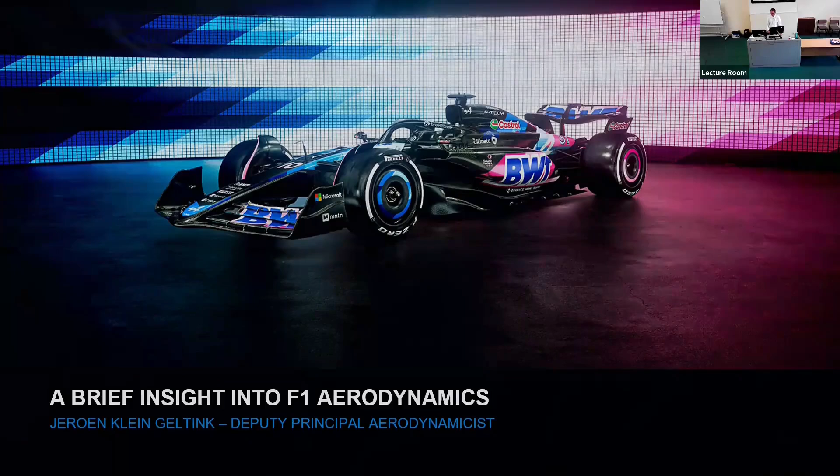But first, trying to wake you up with a sleek marketing video.

So hopefully that gives you a bit of a better idea who we are. This is a picture of our factory in the lovely Cotswolds, about 45 minutes from here, not that far from here in Enstone.

I'll give you a quick introduction into our team, into Formula 1 in general, then I'll tell you a bit about Formula 1 aerodynamics, delve a little bit deeper into the tools we use for our aerodynamic development. And last, I'll tell you a bit about my role with the team and the journey to get into Formula 1. And then there'll be hopefully loads of time for some questions afterwards.

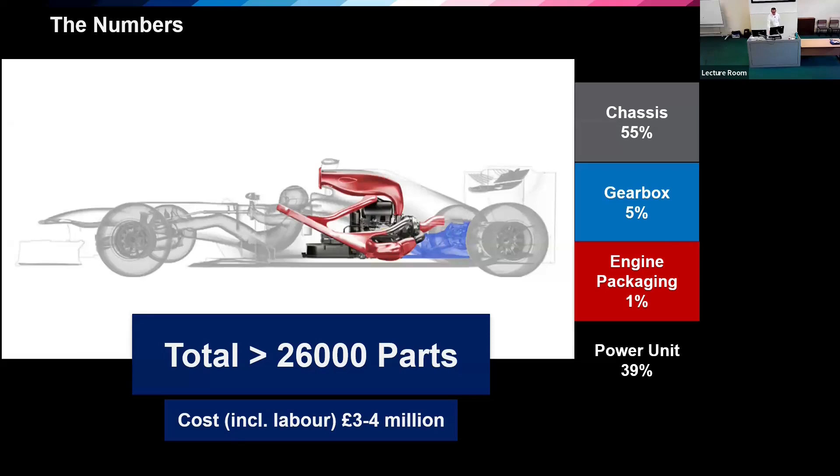Then a question I get a lot, and I'm always a little bit offended by it. Why do all the cars look the same? Because to me, they don't look the same. I know every little detail on every car, particularly in my area, the front wing. But this is the reason why. So the FIA regulates the sport. We are in the sport, so there's loads of rules. And there's about 180 pages of rules.

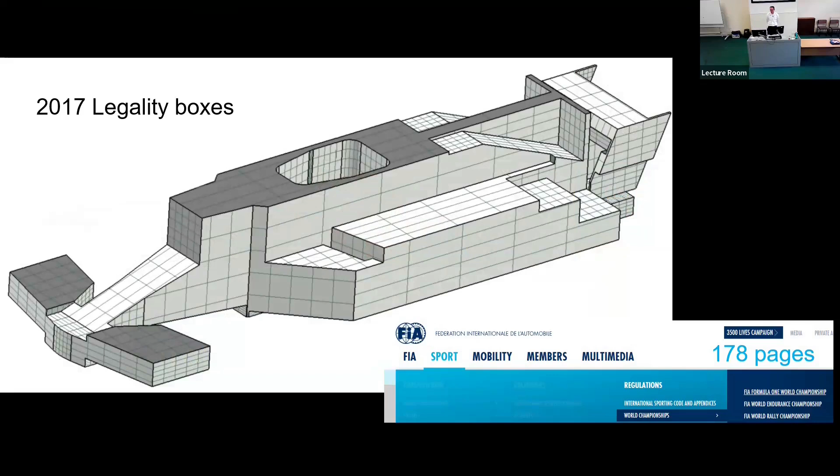If you ever struggle to sleep, you can just go to the website and download it. But yeah, it's very complicated. I literally had a discussion today with 3 people for about 20 minutes. And I still don't know if it's legal or illegal with the rules. It's definitely in the gray area. That's what I know for sure. But yeah.

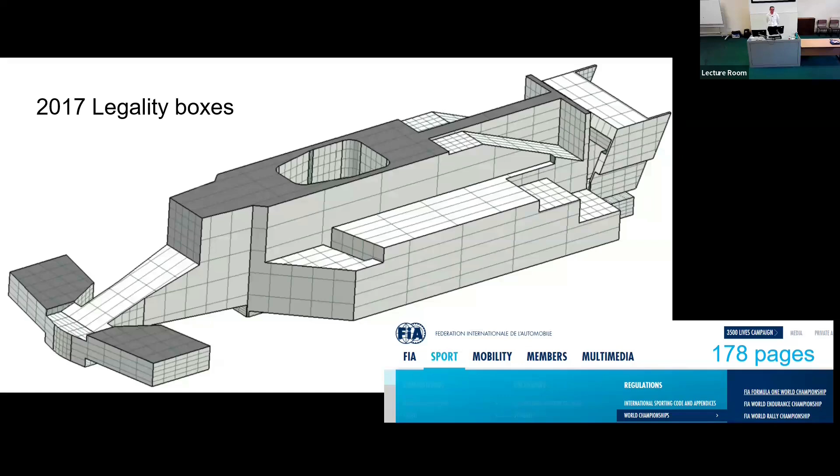Here you can see what we call the legality boxes. So those are the boxes that the car can be in. And as you can see, that defines the shape. You can see the front wing there. You can see, I don't know if you see my cursor, but you can see the rear wing end plate, for example. So that's why the cars look the same, because they need to comply with the same rules. And they need to fit in the same boxes.

Right. So what do we do? Well, we design, build, develop and race 2 race cars with one goal, which is winning the Formula One World Championship. What we've got in Enstone is more or less any job you can think of. We're that big with 1,000 people, but we have a huge engineering office with loads of engineers in there who are responsible for the design and development of our car. There's obviously aerodynamics with our wind tunnel, with our supercomputer, our computational fluid dynamics, CFD analysis.

But as you can imagine, getting those 26,000 parts all together at the right time to go racing is a lot of planning involved. Purchasing of raw materials and anything we get external, that all needs to come together at the right time. So we've got a lot of people working in that as well. You've got a lot of modeling, the strategy of any VPG, vehicle performance. So we've got a lot of people that are good at that as well.

And as you can imagine, human resources, marketing, IT, a pretty big department as well, because we use a lot of computers. So if you want a job in F1, you don't necessarily need to be an engineer. If you're passionate, we've got a lot of positions and we're always looking for people.

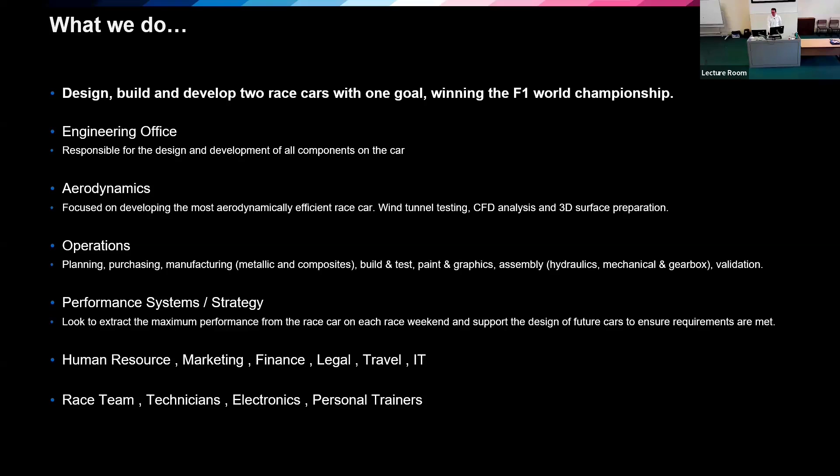So some facts about Formula One, because there's not really any country in the world where Formula One is the biggest sport. But globally, it's absolutely huge, and not everybody always recognizes that or knows that. So Formula One is owned by Liberty Media, privately owned. It's the most valuable sports empire in the world, bigger than some of them that own Premier League teams, American football teams, things like that.

Race attendance in 2022, 5.7 million people went to the races. And then our average audience for a Grand Prix is 70 million. To put that into perspective, they call it the biggest show on earth, the Super Bowl, has fewer viewers. And you can imagine, if there's a final where Lewis Hamilton and Max Verstappen are equal in points in Abu Dhabi, I think it was over 200 million people watched that. And the only yearly sports event that has more viewers than Formula One is the Champions League final.

So that kind of explains why there's so much money involved with it, and why you put so much work into getting these cars to race every other weekend. Right, that's a lot of words and a lot of text, but I quite like to show this video, which I think shows quite nicely how much is involved, and it also gives you a little bit of an insight into our factory. It was from when we were called Renault, so it's a little bit older, and it's pretty obvious that it's from our sponsor Microsoft, as you can probably hear, but I still think it's a nice one to share.

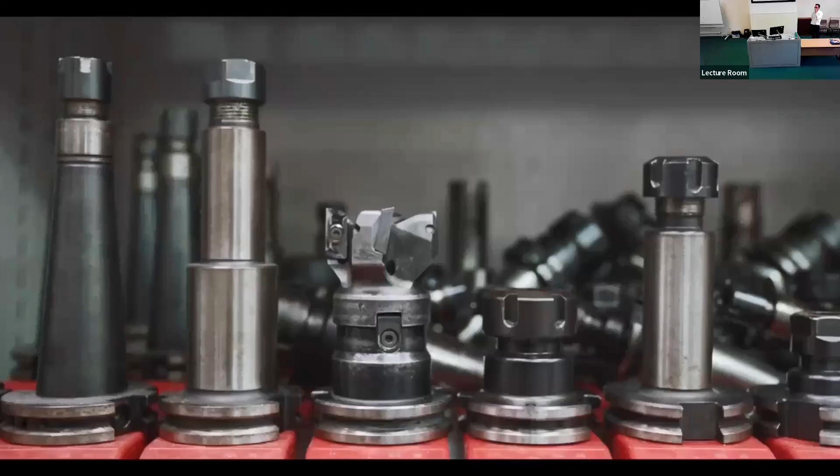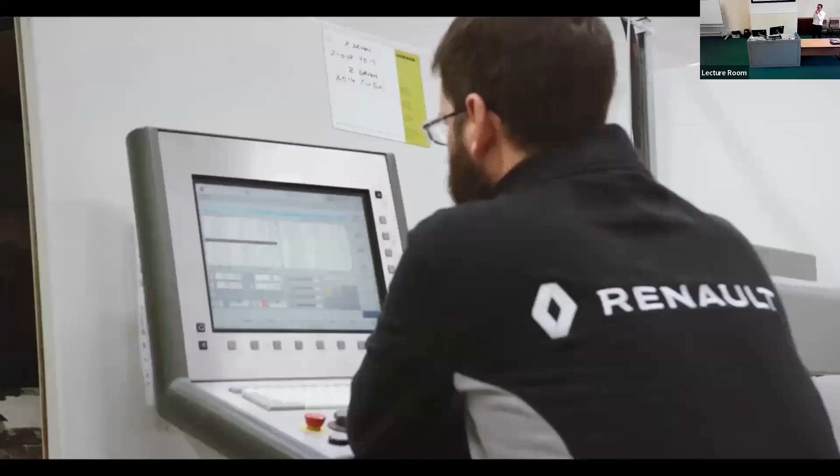What people tend to forget in Formula One is that it takes in excess of 1,000 people to design, build, and operate two of the fastest racing cars in the world. It's all about collaboration and data produced by everyone. This year, we are going to experience a major change in the regulation. Every single part of the car, roughly composed of 26,000 parts, will be new. But that's normal. Everyone's cool because everyone knows what they have to do thanks to the experience, but also the software that supports this organization. This is where Microsoft is helping. We started making parts for the new car before that season had finished. The pressure's really on us to deliver. We can have parts that are design released a day before they're needed, when the car goes to fire up.

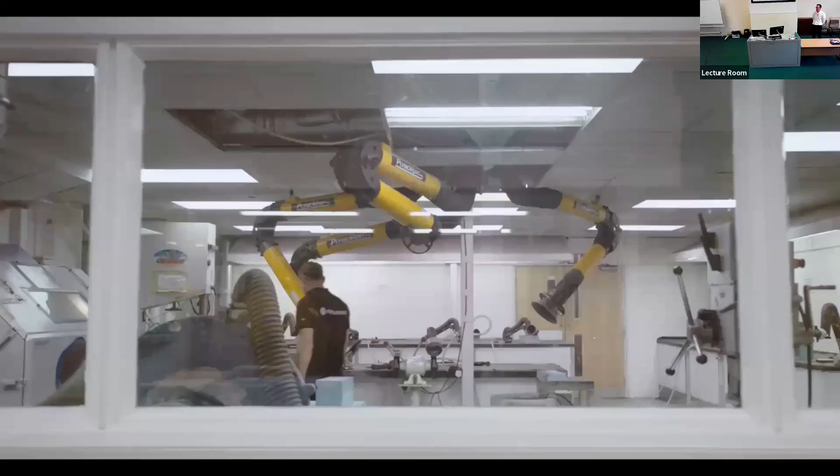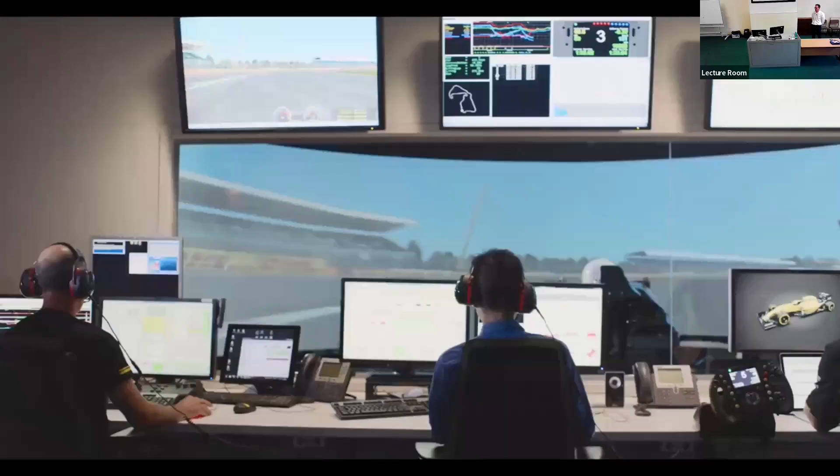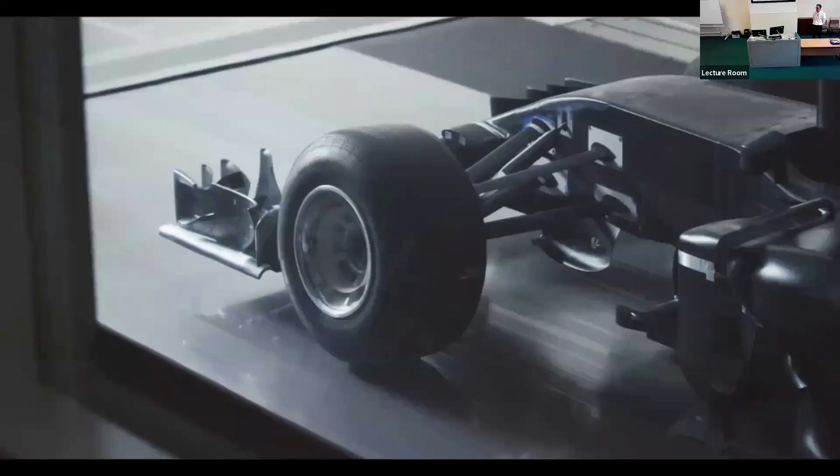It's very important here that we get manufacturing processes as streamlined as they possibly can. That has been the main area of focus for business intelligence. The introduction of Power BI and the products from Microsoft will have an impact on the car and the ultimate performance. Data is critical to F1. Without it, we wouldn't understand how the car's performing, and we wouldn't be able to do the simulations to prepare for the season ahead. Formula One is very strict. We can't just build a car to any spec we want. Things like the amount of processing we're allowed to do and the number of hours we can run the wind tunnel are dictated by regulation. We see this as a way that we have to innovate to get a competitive advantage. There's 20 races this year. When you're the other side of the world, time zones are the biggest problem. You have to communicate on a platform where people can see the information when you're asleep and people can see their information when they're asleep.

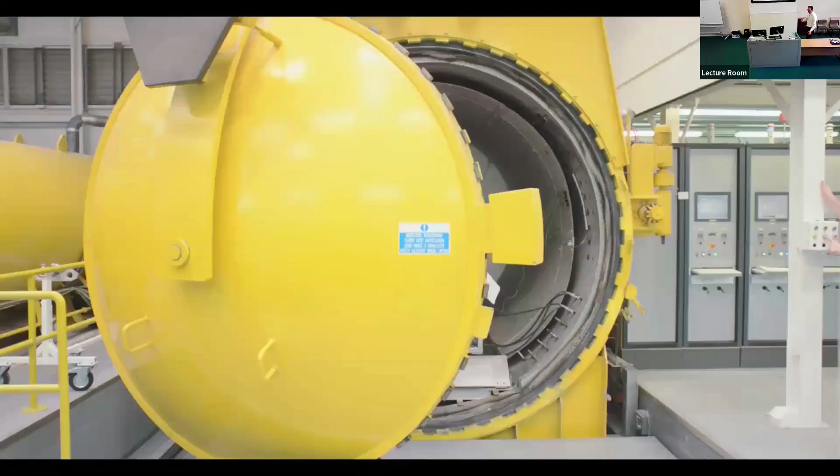While the cars are going around the track, over 200 sensors are sending back a constant stream of time series data. Having our data stored in the cloud means we can access it wherever we are, but we have to make sure that our data is protected. And we know the Microsoft Cloud is only accessible by the people we want to access it. What is very unique in Formula One is that the result of our work is measured against competitors every other week. We cannot negotiate on deadlines. We cannot negotiate on budgets. Everyone has to work against the clock. You have to be ready for when the lights go out.

So hopefully that gives you a bit of a better idea about our team and Formula One in general. Sorry. So let's move on to aerodynamics. I don't know if you can see my cursor or not?

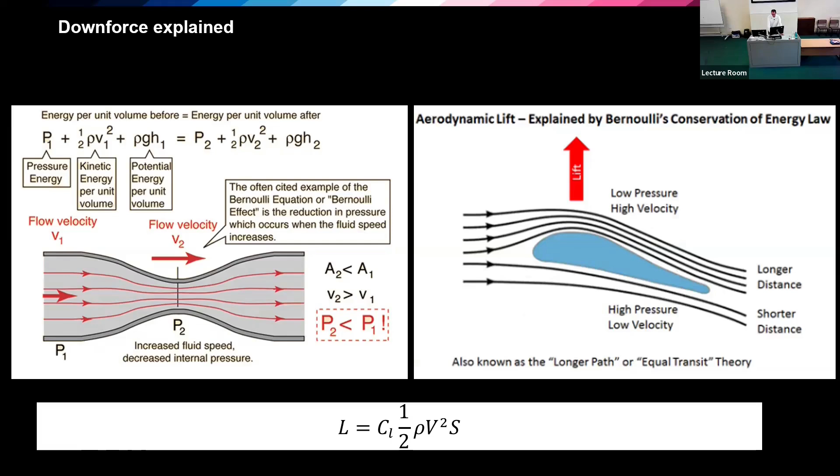So we go faster, so the kinetic energy becomes a lot more. That means the pressure energy must become less. There's lower pressure there. So if we then look at an airfoil here, and we follow these streamlines, the one on the top and the one at the bottom, and they meet again at the back, then the one on the top has to go a lot faster because it has further to travel to get to the back than the one on the bottom. And now we know if it goes faster, pressure must be lower at the top than at the bottom. And that's why you can fly away on your holidays. And that's what we use in Formula One, but upside down.

So I always like to do a little experiment with people. You can use your lap or the table in front of you. If you just get your hand and you move it around, it's very easy to do. If you start pushing down on it, it's suddenly a lot harder. So that same hand suddenly has a lot more grip. And that's exactly what we do with the tires. We really squash them down on the surface. They get a lot more grip. And if you have more grip, you might win a trophy on a Sunday.

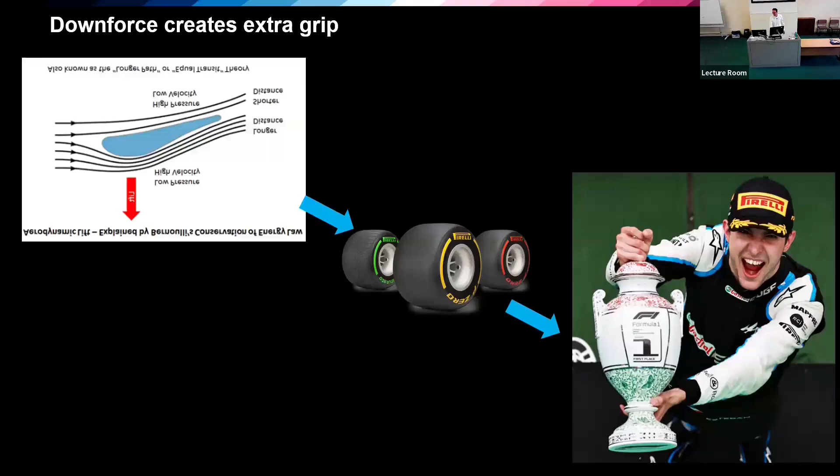So now I thought I'll break it up a little bit with a question, because this question has been going around for ages. Do we actually create enough downforce that a Formula One car can drive upside down? So we know it's related to the speed squared. I can't tell you the lift coefficient of our car, that's highly classified. You have to trust me, but with a show of hands, who thinks a Formula One car can drive upside down? What speed? Well, within the 200 miles an hour it can do.

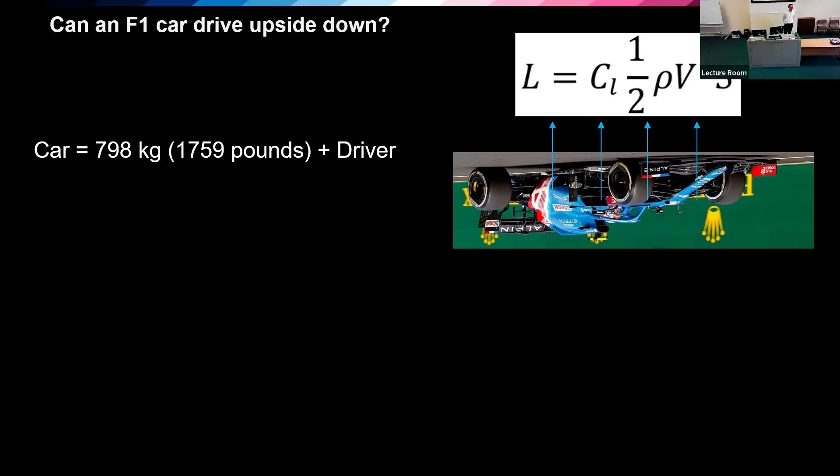So about a third of people think it can do it. Well, I did the calculations. Our car can drive upside down at 110 miles an hour. So it is possible. And actually, I Googled it, and there's a company trying to get funding, I believe, to actually prove this, which would be handy because then I don't need to answer the question every time. But as you can imagine, it's going to be pretty challenging to go that fast and then smoothly go upside down for quite a while. But yeah, hopefully they succeed, and I can show a video next time.

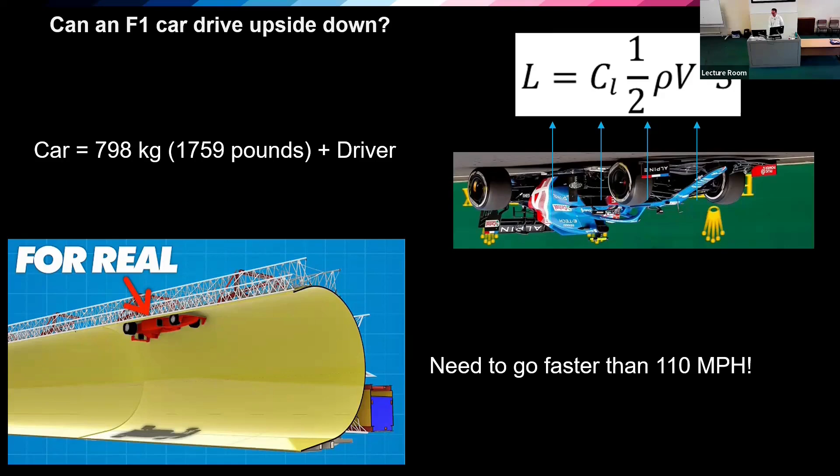So where does our downforce come from? About a quarter of the downforce, 25%, comes from the front wing. That's the bit that I look after for our team. Then half of it is all from the floor and the diffuser, which is very frustrating because you can't actually see what's happening with the other teams. So we're always delighted when somebody crashes with a new floor, like Norris did the other day, and it gets turned up in the air.

And then 15% comes from the rear wing. And yeah, any of you clever people quickly calculated that's not 100%, and that's correct. So all the little flicks around the rear wheels and everywhere else on the car, they account for about 10% of downforce.

And these are the tools we use to develop our car aerodynamically. So we've got computational fluid dynamics, CFD. We've got our own on-site wind tunnel. We do track testing with a lot of sensors and rakes and things like that. And we've got a simulator on site.

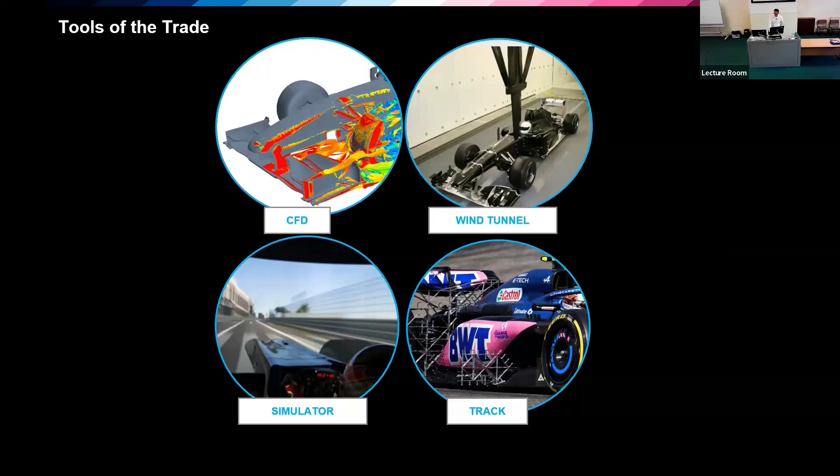I'll go into the tools in a bit, but first a bit about our design process. So we start here on the left with a new idea. I don't know, somebody drove into work and suddenly thought, wait a minute, let's try this. What we first have to do is put that in CAD. We need to put that in the computer, and it's just the surface, just the outer shape. We don't really care what's underneath it or if it can be made, anything like that.

Then we put that in CFD, and here you see it's a loop because we're very regulated in what we can do in CFD. We can do about 225 different geometries a week. Quite often you do a few loops because it never works immediately. So you improve it, you go back to your CAD, back to CFD, and then you go, wait a minute, this is good enough. We'll send it to the wind tunnel.

It then will be made. So we actually have designers that turn my surface, with no thickness, nothing, into an actual part. Most of those parts are rapid prototyping. So we've got a big manufacturing department making those, and they will then go in the wind tunnel.

Yet again, wind tunnel, very restricted. We can do about 30 different geometries a week. That's what we're allowed to do by the FIA. Quite often that needs another iteration as well. So you need to go back to the CFD. Maybe it's not good at all, or it's okay, but not really good enough yet to go to the track. So you go back to the drawing board, you do again your CAD and CFD, and then after maybe 2 or 3 iterations, you go, yeah, that will make the race car quicker.

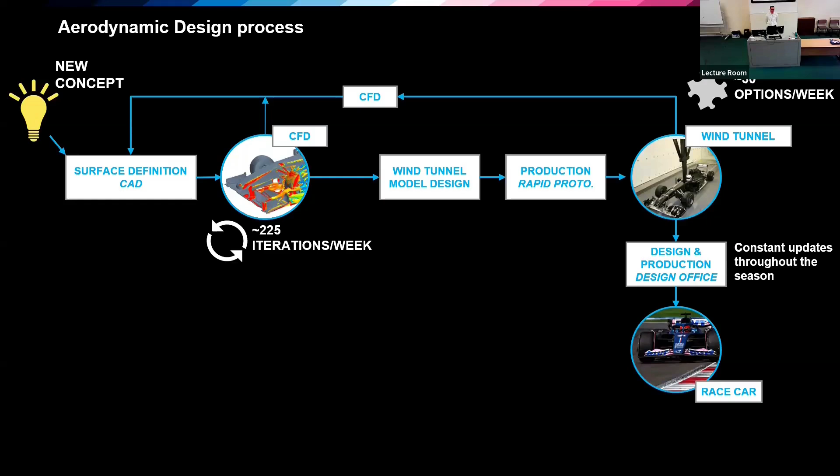What's really important, and even more so now we're very restricted, is the correlation between our tools. As you can imagine, if you see something in CFD that looks absolutely amazing, you put all that work in, it goes in the wind tunnel, and it's not working at all, that's a problem, because you spent all that resource, your CFD runs, your wind tunnel runs, and you have nothing to show for it. What's even worse, if it's better in the tunnel, and then at the track it doesn't work, it's actually making the race car slower. That is a really big problem, because the track is always weeks behind what's actually happening, you've been developing in CFD with it for weeks, in the tunnel for weeks as well.

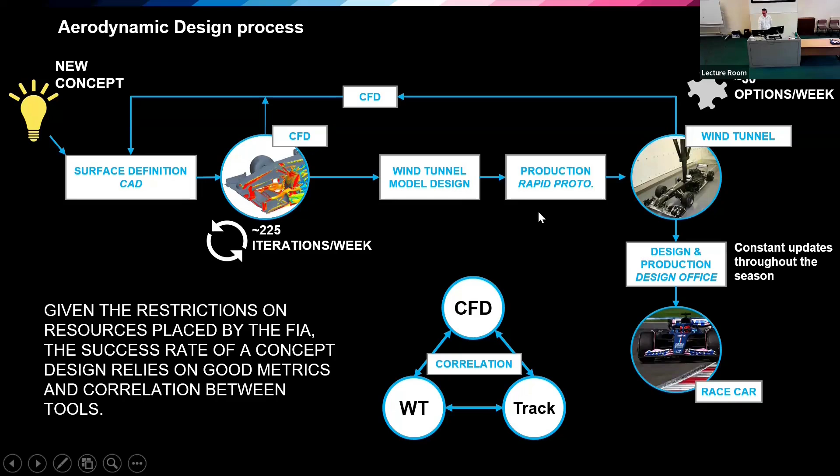So yeah, it could really take you down a path where nobody wants to be. So we put a lot of work into our correlation to make sure our tools, when it's better in CFD, we know it works in the tunnel, and when it works in the tunnel, it definitely works at the track. So a lot of work goes into that, and it's really quite important.

Right, I'll go into our tools a little bit more. So first of all, CFD. So the tool we use most.

How does it work? Well, unfortunately, we can't actually solve the aerodynamics. The Navier-Stokes equation hasn't been solved yet. If you know how to solve it, please do. Plus, you can collect $1 million, because the Clay Mathematics Institute has a prize on that. So that would make all our lives easier, but unfortunately, we can't do that.

So what we do, we chop the air into tiny little cubes, about 200 million of them, and then we calculate in each cube what's happening, and that then has an effect on the next cube, and the next, and the next, and you iterate that until it's kind of stable, and then you go, right, that's our solution.

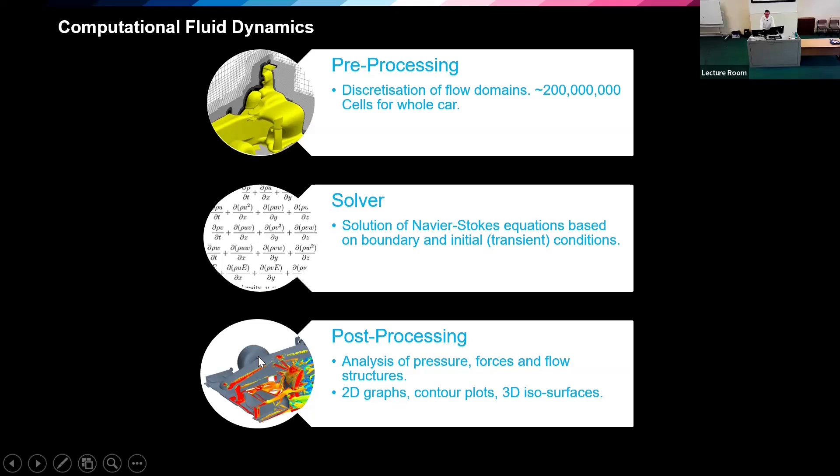So it's quite a computational heavy process, and then we can post-process it, and that's really where CFD is incredibly strong. I'll actually show you, because you can see everything. Normally you can't see air, so you don't always know what's happening. But in CFD, you can interrogate it all.

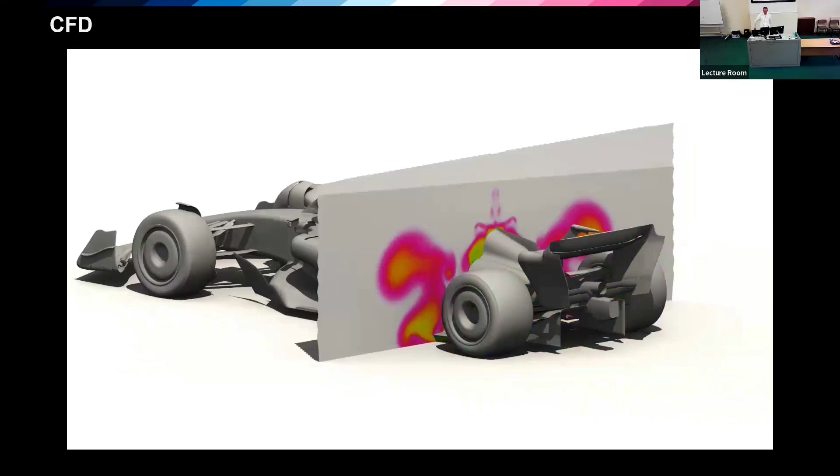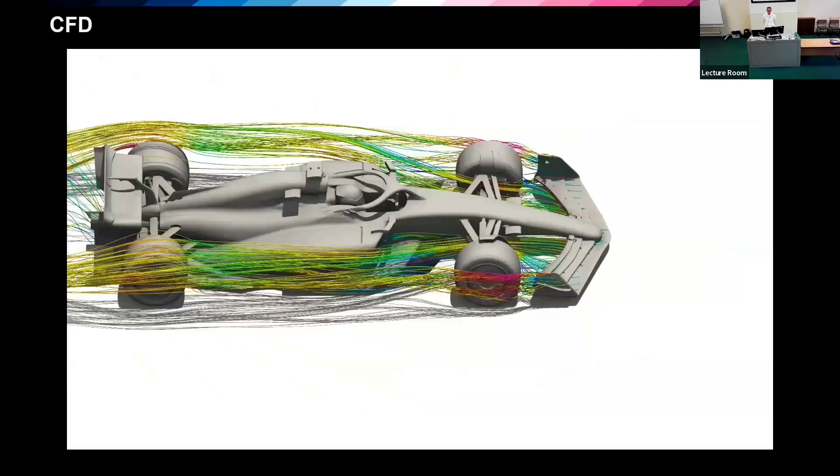These are the streamlines. So for example, sometimes you see something going wrong in the back, but it actually turns out that the junction of the front wing and the nose, there's something going wrong, but the loss of that ends up all the way at the back. But with CFD, you can actually trace that. So that's really quite powerful.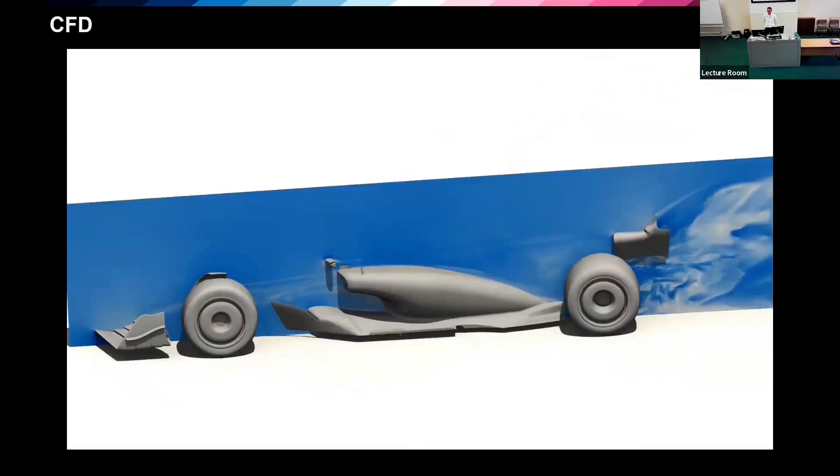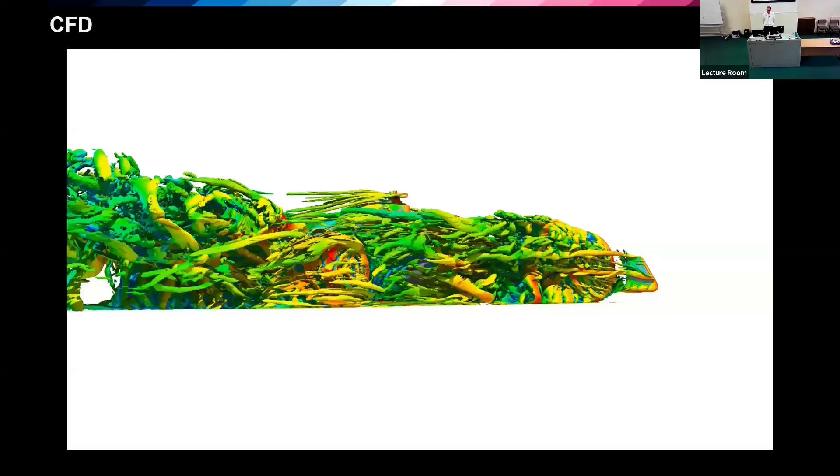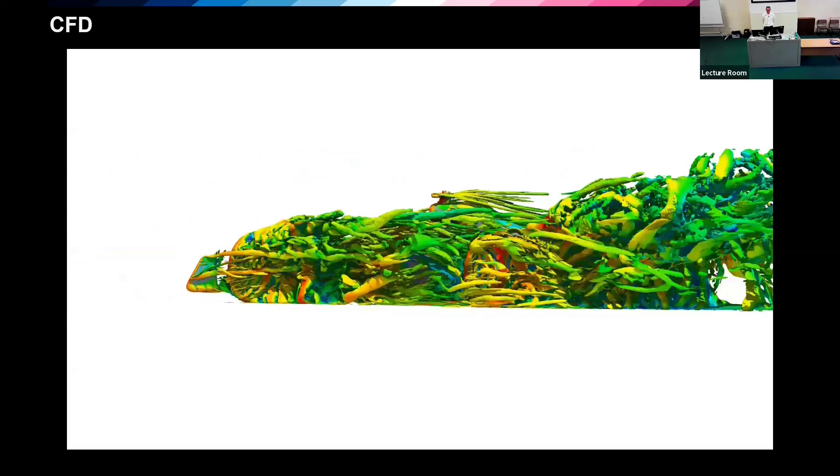It also shows you how complicated Formula One aerodynamics is. Incredibly unsteady flow around the car. These open wheels might look lovely, and the fact that you can see the driver, but it's a huge problem. The Alpine outside would be a lot easier to work on than this Formula One car. As you can see, it's an absolute mess. And that makes it really challenging, but also for the CFD solver to solve it, because the wheels are rotating, they're changing shape, all of that.

So yeah, correlation can be challenging at times.

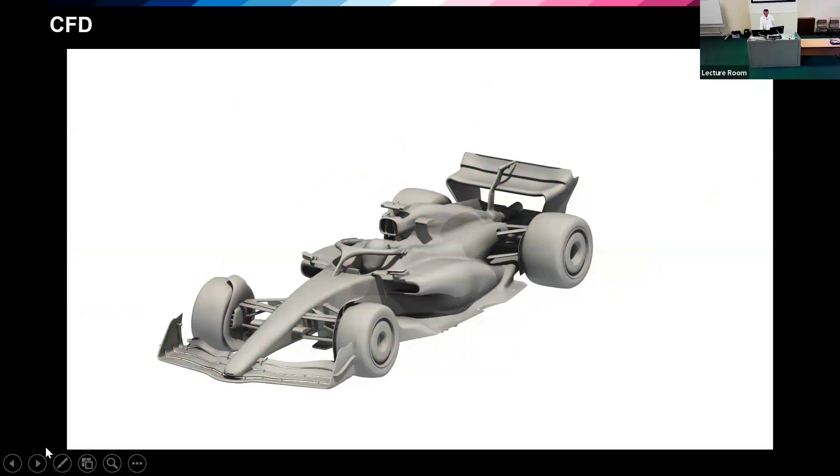The other thing we use CFD a lot for is to analyze all our heat management on the car. So unfortunately, we're not allowed any active aero components, which also means we can't have any fans or anything on the car. So normally your road car, when you stop, you hear the fan blowing to cool everything down. We don't have that.

And that's why when you see a car suddenly stop at the track, within no time, things around the brakes, around the engine all start smoking and catching fire because nothing is cooling it down. And also when the car comes in the pits, you see a whole crew jumping on it with leaf blowers and things like that. That's all to cool it down.

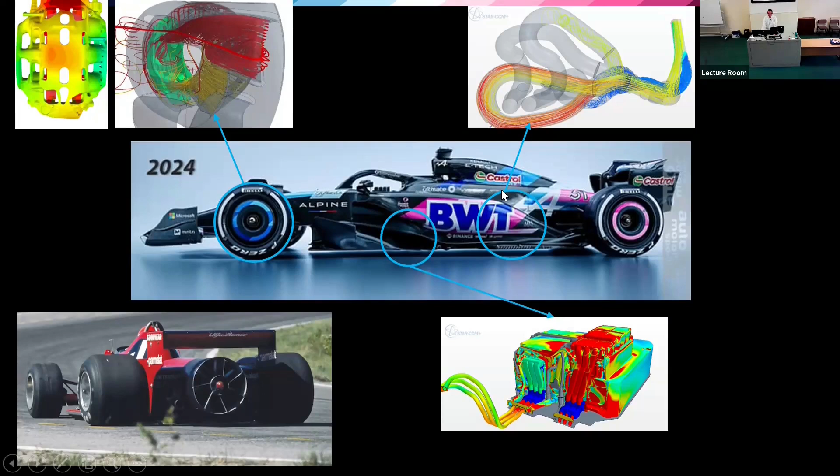So yeah, we use passive cooling, just the airflow. This is the inlet duct on the front brake. And we have all kinds of ducts in there to cool the disc, but also the caliper and everything else. Obviously battery packs inside. The engine itself has radiators, things like that. And that all is done in CFD and not in the wind tunnel.

That's not the case anymore because we're heavily restricted. The cost got out of hand, and the FIA said this is getting ridiculous, teams are going bankrupt. So the amount of computational power we can use, we call it MAUh, is restricted. What that means is we do less CFD than in the past, but also we need to really think about how we do our CFD.

The most complicated simulations, the unsteady ones, are really computational heavy. So do you do one of those, or do you do 50 simple computations and then use an aerodynamicist to interpret it? Because we kind of know where the simulation will struggle. So we quite often choose quantity over quality, but that makes it quite challenging in terms of correlation for CFD to the wind tunnel.

To show you how restricted it is, when I started, well it's actually a few years later, but we did about 30,000 CFD runs before the car would hit the track. 3 years later, that was halved. And I think we're now doing about 11,000 CFD runs. So it has got a lot less.

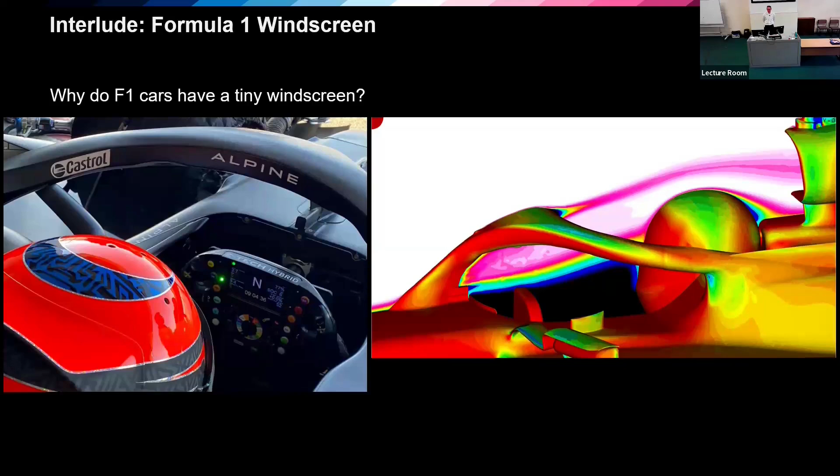Then a little interlude. You know about CFD now, so let's see if somebody knows this. The question is, why do Formula One cars have such a tiny, ridiculous little windscreen here? You can barely see it. It's so small, it's definitely not to keep our driver dry in the rain.

So here I got the CFD. I dug it out without windscreen and with windscreen. It's from a few years ago. But it shows you the principle, and at the back you see the energy in the flow, and on the surface you can see the surface pressures. If it's blue, it's suction. If red, then it's a high pressure. And here you see the delta.

It has to do with helmet lift. So you can see here, there's actually suction. The air goes faster over the helmet, so there's suction there, and the helmet wants to take off. You can see when you've got your little windscreen here, there's less suction there. So I think it reduces about 50% the helmet lift. Unfortunately, as you can also see from the back, it's not very nice aerodynamically.

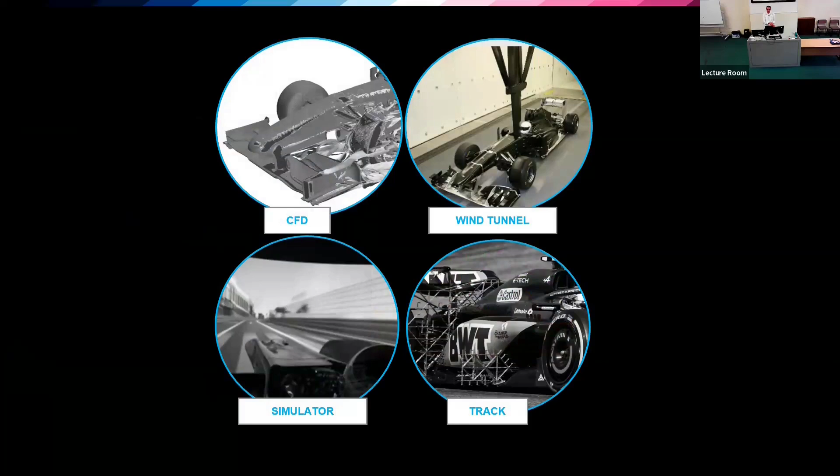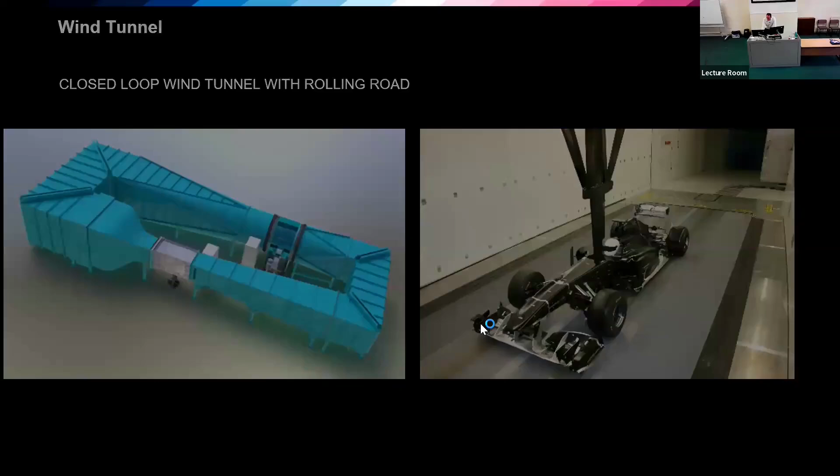And I actually found a video of it running. This is a few years ago, obviously, again, because, yeah, I don't want to show you our current tunnel.

As you can see, we have a rolling road underneath the model, and that's because in reality the race car will go forward, but here the model is stationary, so the track needs to move, because else you get a boundary layer buildup on that surface, and with anything very close to the ground, you don't get a good simulation of it. So that's why all the Formula 1 teams have this belt running quite fast underneath the model.

As you can see, we also get mini tires from Pirelli, so they give us 60% tires of the real ones. And then we've got all kinds of systems to operate the model. So you can see a yaw in a little bit, so it's simulating a corner or a bit of crosswind. And it can steer as well.

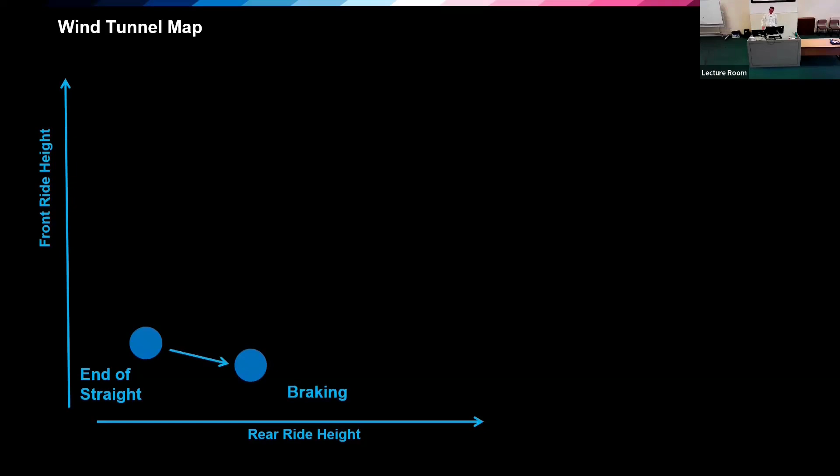Then we slam on the brakes, which means, as you know in your own car, when you slam on the brakes, you fly a bit forward, so the front comes down a bit, the rear comes up, and then we scrub all that speed off the car until we hit the apex of the corner, which is the slowest bit. By that point, we don't have a lot of downforce on the car, so we're quite high up. Rear ride height, front ride height is all quite high.

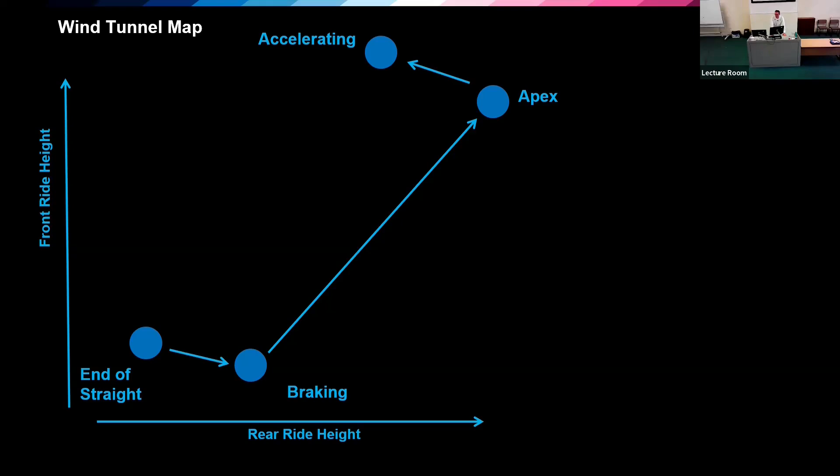And then we accelerate. So what happens is the car kind of goes a bit on its rear axle, so the rear ride height reduces, front ride height comes up, and then we go through all of that again. So what you get is kind of a potato shape of all the front and rear ride heights the car sees.

And then what happens with the wind tunnel map is that every team tests a bit of a different bit inside the potato, and also will maybe emphasize a different bit. That's why you see some teams are good in high-speed corners, other teams are good in low-speed corners. And that's why you see the competitive order kind of changing with teams throughout the season.

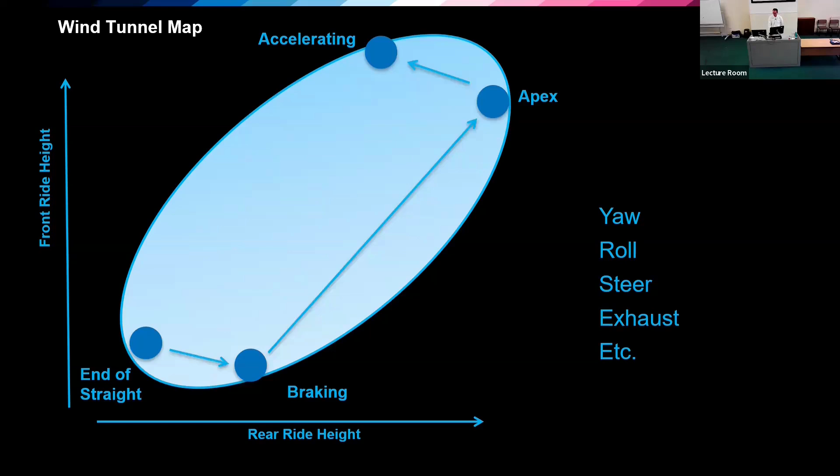And it all has to do with their secret sauce, their wind tunnel map, what they do with that. This is just 2D. Obviously, we've got the yaw, we've got the roll, we've got the steer, we've got the exhaust blowing. So it's all a multi-dimensional space, and it's quite a complicated thing to navigate through, and always a good topic for discussion amongst aerodynamicists.

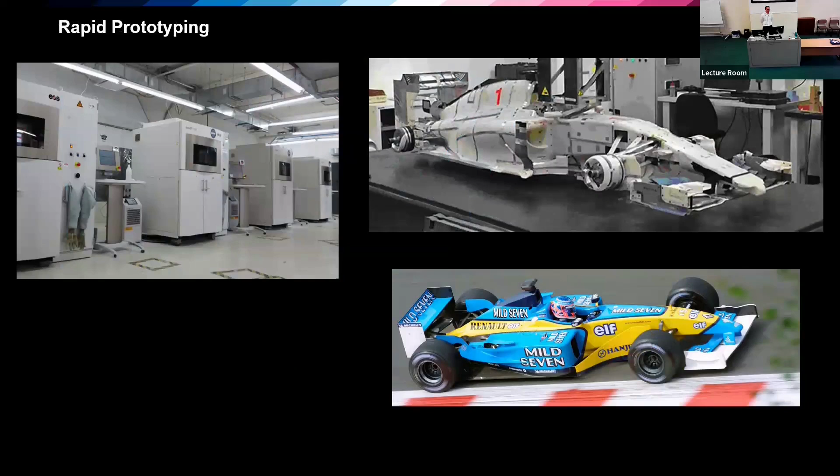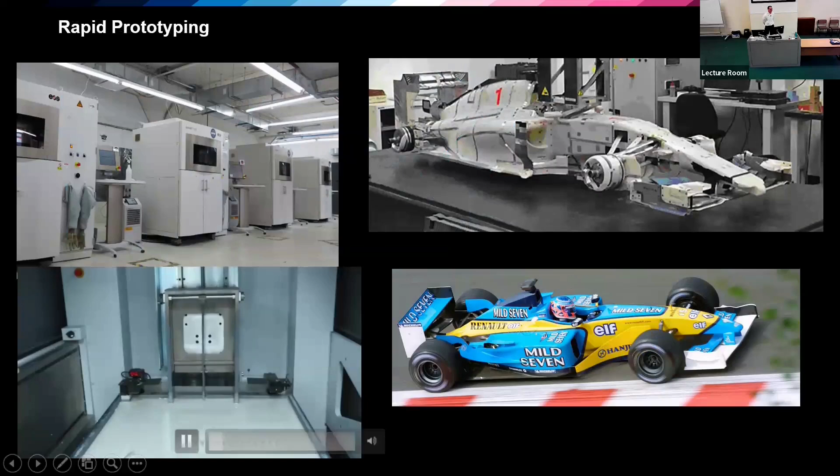Then another thing that I already mentioned is our rapid prototyping. When I started doing these presentations, people were absolutely amazed by it, but now everybody has seen a 3D printer or maybe even got one. But yeah, we've been using these kind of 3D printers, rapid prototyping, for 2 decades now. And it's really an amazing kind of tool to be able to test all the aerodynamic parts in the wind tunnel really quickly.

So here, this was the Manor wind tunnel model when it was for sale, and they actually hadn't painted the parts. So anything white is rapid prototyping. And as you can see, it's a bit like Lego. You can change all the little bits, you can test them. And here you can see as well, you just got a row of, I don't know, 4 or 5 different options that come out of the machine.

And it had made the shape of the cars really a lot different, a lot more complicated. Because in the early 2000s, there was Button in one of our cars. All the parts had to be made by hand, by people. And, you know, the shapes had to be a lot more simple than the kind of 3D stuff we've got now. So it really has helped us to really explore the aerodynamics.

So what do we have there? We've got load cells on the car, so we know what loads go through the suspension, and from that we also know what downforce we get in certain places. We've also got temperature sensors all over the car.

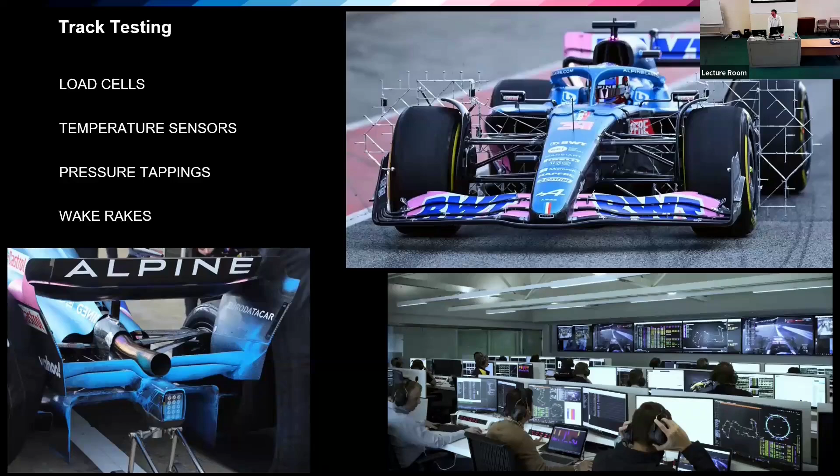Okay, the last bit I like to mention is driver psychology, because it's not just about peak aerodynamics. It's actually quite easy to create a car that has a lot of peak downforce, but if it's not a stable platform, if it's not predictable to the driver, and if it doesn't comply with the driver's wishes, he can lose half a second to a second a lap.

You can imagine if you're going to the limit into a corner with this car, and lap to lap it behaves slightly differently in that corner, you're not going to go full out - you're going to hold back a little because you don't know what the car is going to do. And that costs a lot of lap time as well. So actually it's even more complicated, in that you need a very stable platform that also has a lot of downforce. Only then do you get champagne on Sunday.

Okay, as I said, that's the last bit.

I always get asked how I got into F1, and the other question is what a typical day for me looks like at work. So I thought I'd preempt those with a bit of information - first, my journey into F1.

I'm Dutch, I grew up in the Netherlands, and my dad got me into Formula One. I absolutely loved it from maybe 12 or 13 years old, particularly the technological side, because I love sports, but this is a combination of sports and technology. So it got me really excited.